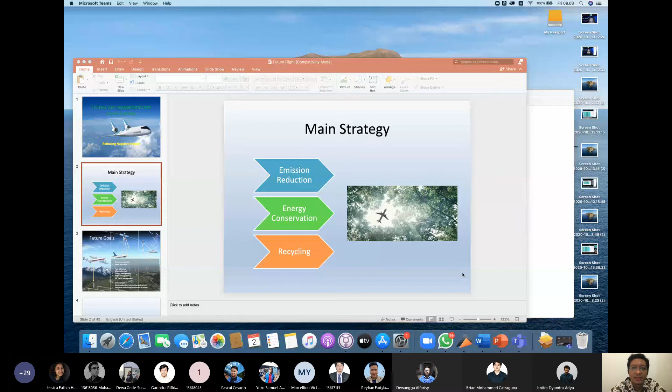We will talk about the future air transportation with green concept. So this is the main strategy. First, we want to reduce the emissions. Second, we want to conserve the energy, so we have to develop technology with less fuel consumption, or maybe also another kind of energy. Third, we want to recycle all of the waste and reduce the footprint in production.

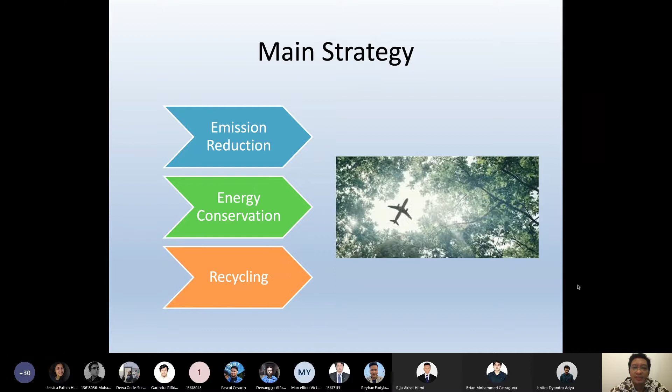We will discuss about this. This is the future goals, you can see on the left. This is the technology from the past decades, maybe 50 years ago. So all of the air transportation system developed mostly based on the technology after the Second World War.

And then in the current situation, we can use the satellite, for example, and also there is data communications already there to create a more robust and efficient communication system. But in the future we will use another technology. For example, you can see the new type of aircraft that maybe uses less energy using the most advanced aerodynamics design.

And also there is many kind of communication system using small satellites, microsatellites, such as Starlink that becomes controversial because they want to launch thousands, about 40,000 microsatellites. But if the technology is available and cheap enough and green enough, maybe we can use it for the next communication based on the satellite.

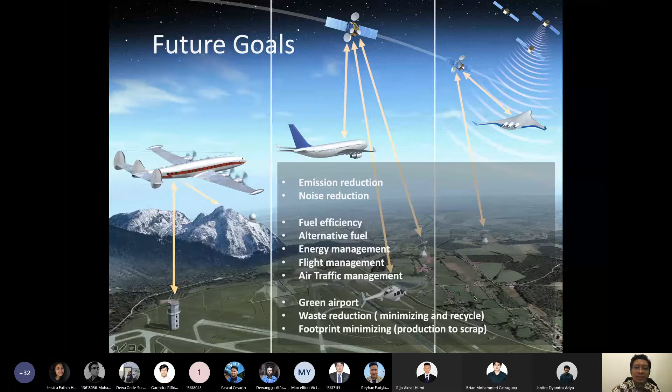Okay, we talk about the future aircraft design. You know that aviation has made steady and significant progress. This is about half a century, from the 1950s until today, and there is a 90% reduction in noise footprint, becoming more silent than previous jet airplanes, and also saving about 70% fuel improvement. So this will reduce the CO2 emissions. That's a good achievement in half a century.

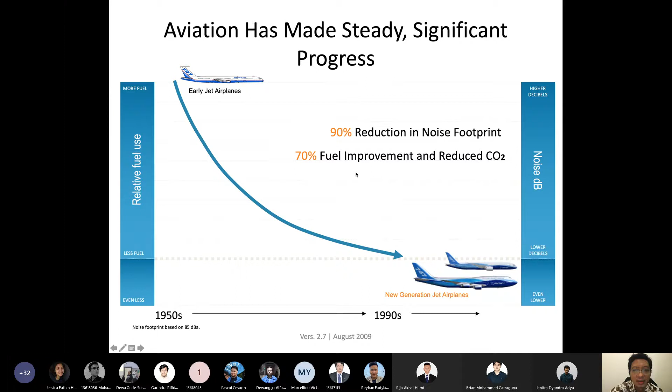But because air transportation becomes common and very popular, the total number of flights and flight times increase significantly, so we still have to consider how to achieve a more efficient system in aviation transportation. You know that aircraft technology is one of the most efficient modes of transportation, compared to current existing car transportation, for example.

But I think in the next decade we will transform to electric cars, resulting in a more efficient and less emission system. Using electric is not a good choice for air transportation though. You know about the battery - it's basically dead weight, you have to carry the battery for all the flight time. When we use liquid fuel, we may bring a lot in the early phase of the flight, but when we cruise, by the time the system becomes more efficient because we bring less fuel.

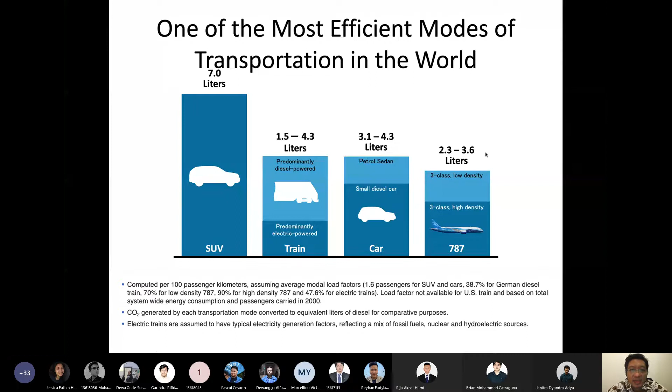Today's aircraft is the most efficient transportation. You know, to bring you from Jakarta, for example, to Amsterdam, to Europe, it's only about 13,000 kilometers, and a Boeing 747 usually takes about 70 tons of fuel. But compared to the distance and the time, the flight time is only several hours, not until one day - it's very efficient. So per kilometer, the specific fuel consumption is very low. Yeah, that's the aircraft.

Okay, this is the sum of the equivalent emissions, for example, still less fuel and less emission in today's technology. We hope that this technology will also transfer to other modes, so we can save or reduce pollutants coming from transportation. And I think electric cars will have the main role in reducing CO2 in the future.

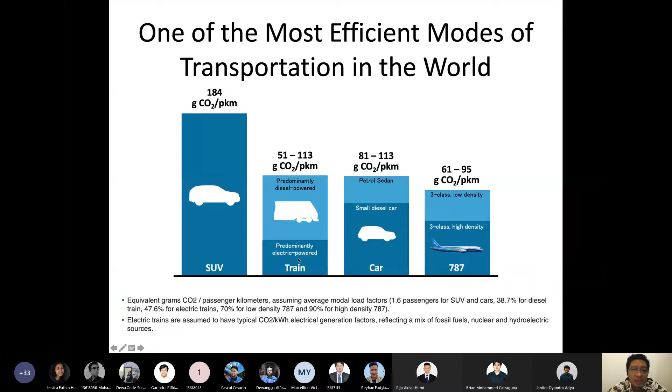Electric trains are assumed to have a typical electrical generation factor mix. Oh, this one is predominantly electric power. Yeah, okay.

And we already discussed this technology solution on aircraft emissions. First, we have to improve - and I think this is why we call it aerospace engineering, because the basic of aeronautics is aerodynamics. If we have better aerodynamics, then we need less structure, and then we can reduce the weight, and we need less power, so we need less fuel.

So all of the other technology will be affected by the aerodynamics improvement. Yeah, and I think one of the technological cutting edges, the state of the art of the technology in computational fluid dynamics, comes from aerospace engineering, because it's very typical.

One of our alumni, when he worked in Japan, he used aerodynamics. His job was to simulate the aerodynamics in the computer hard disk - the older technology computer hard disk using a magnetic disk, and the rotation is about 6,000 RPM.

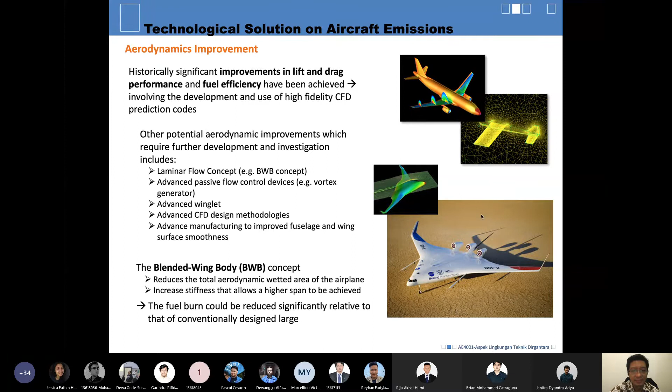Airframe weight reduction usually comes from new types of materials and also new structure design. For example, maybe you know about generative structure design—that's another state of the art technology in structure design.

We only put in the position of the load, and the computer will generate many alternative structures that give the most benefit but the least cost—so it maximizes the benefit-to-cost ratio.

You may know that if you take a structures course, there's generative design in structure. Airbus, for example, already used this new type of design to improve their structures and significantly reduce total weight.

If you know about generative design, the result usually looks most like a bio-design. For example, human structure—we have bones and muscles—and if you look deep into the bones, there are holes; the structure of bone is not rigid, not solid.

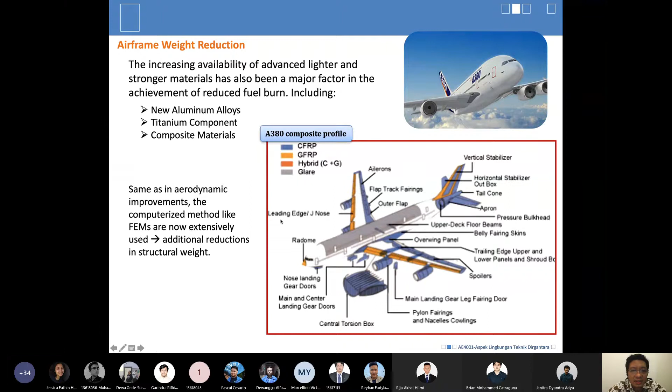The next is the propulsion technology. Thrust-specific fuel consumption has become lower and lower, which is very good. Also the high bypass ratio engine, and light materials, for example using titanium.

Also other materials, maybe ceramics, because we deal with high temperatures. But overall, the propulsion becomes more efficient.

In the future, because we use the electric engine, we can decompose one big engine into several smaller engines. That's one of the new designs in aircraft design, using multi engines, very small but distributed along the wings. You can see examples of future aircraft on YouTube.

So that's the advantage. We have several smaller engines, and we can use only part of all the engines available. For example, when we take off, we use all of the engines, but when we cruise or descend, we can turn off several engines and only use part of the engines available.

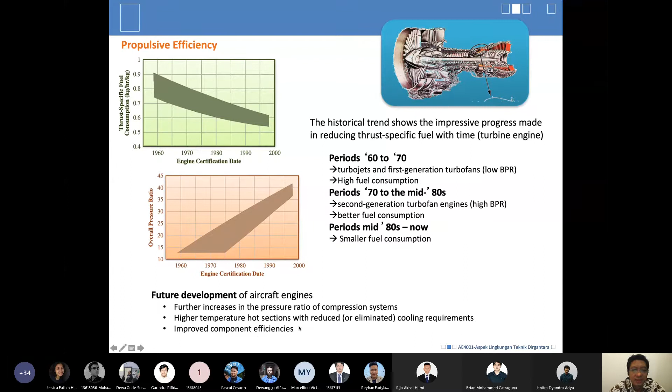So if we can contain the higher pressure and temperature, then we can make an efficient jet engine, and improve all of the component efficiencies. That's the future development of aircraft engine.

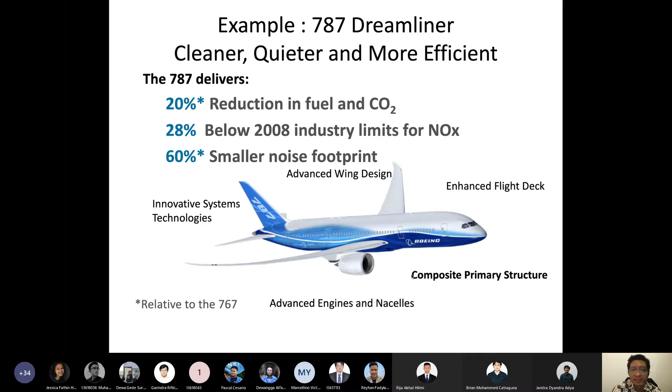Okay, let's take a look at future fuel. The previous discussion is basically based on design, the new improvement in aerodynamics, improvement in structure, improvement in engine. Most of the technology comes from the design side and production, but the fuel basically is something we get from nature.

The idea is to use fuel with high energy density, but more green and environment friendly. So we also discuss alcohols, methane, hydrogen.

I think there is a success story in hydrogen fuel flight, tested by a UK company from England. In the future, we will use hydrogen as the alternative, and it's already been tested.

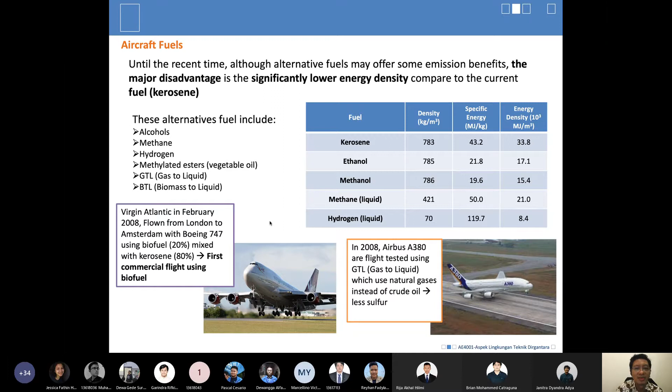Okay, so there's another issue. When we use petroleum-based fuel taken from the earth, it already contains or stores CO2. But if we use plant-based fuel, in theory, the CO2 emission will be absorbed by the plant itself. So there's a cycle.

That's the idea, but another issue is we shouldn't use fertile soil to produce the fuel, because then we would compete with the production of consumable plants like rice, wheat, and other consumable plants. So the technology focuses on how to use plants that can be grown in non-fertile environments.

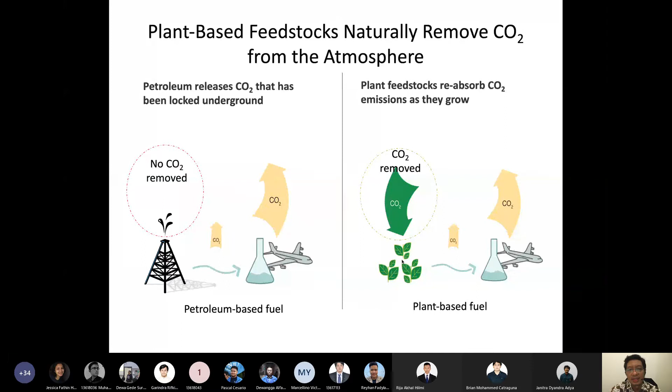Doesn't compete with food or promote deforestation, that's the idea. So the technology we want to use, for example, this is the non-fertile soil. How to use it - we can use a plant, what's it called, Chotora, or Jatropha. We call it jarak. Jatropha is a kind of plant that can be planted into the infertile environment.

Another technology, maybe we will use soybean, but soybean is a food plant, so it's not ideal because we compete with food. But we can use the oil from the soybean. So the technology focus is on algae and Jatropha.

And I think this is the future fuel that's very promising, because there is a lot of sea - we can plant it in the sea, and Indonesia's shoreline is very big. I think this is one of the technologies we can consider, especially if we want to replace coal, the energy from coal. We have coal - we are not rich in oil and gas, but we are one of the big exporters of coal.

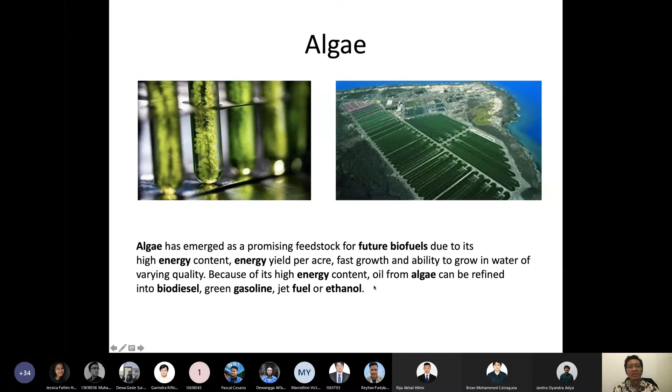But coal is very efficient in terms of energy management, but there's a lot of pollution emission. So another promising technology is from algae, because of the high energy content, and energy yield per acre is very high, fast grow, and ability to grow in water of varying quality. We can refine it into biodiesel, gasoline, jet fuel, or ethanol. So it's very promising technology to use algae for future fuel, and the oil yield is very high.

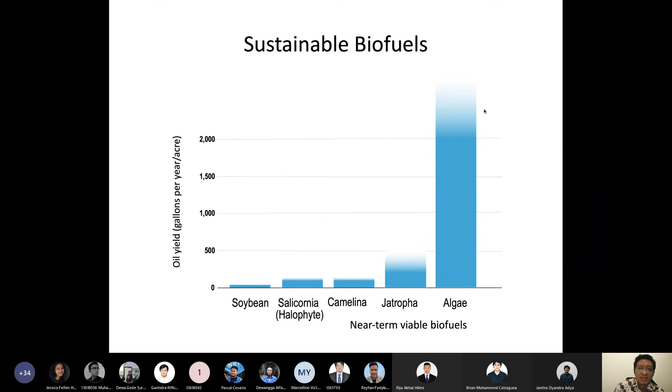Basically, Indonesia is a maritime country, we have a lot of water. So I think this is one of the promising technologies in the future, and we have to invest knowledge and technology in this field.

That's some of the biofuel test flights. Virgin Atlantic using oil from coconut, in 2008-2009. Continental using algae and jatropha. Air New Zealand using jatropha. Why jatropha? Because jatropha can be planted in the infertile environment. But I bet on algae, I think.

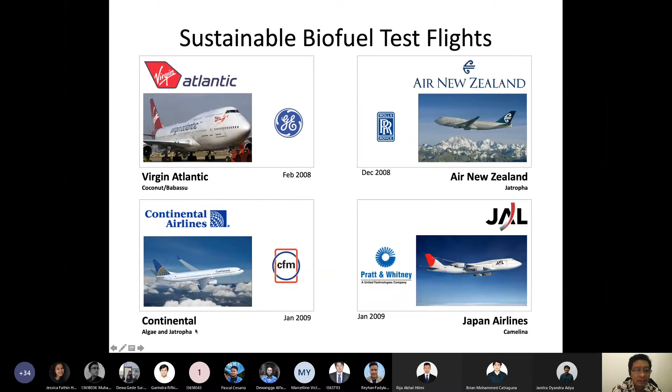Yeah, that's from the fuel materials. And another approach is to increase fuel conservation - we use less fuel because we can manage how to use the fuel. There is some research in the area where we can improve the efficiency of fuel use, because the fuel cost impact is usually 30% of the total operating expense.

Our transportation is very dependent on the price of fuel. When the price of oil is high, usually the tickets become higher, and when low, usually become lower. So there is a high dependency on the fuel price. Usually there is a saving, normally only 3%, using various leverage.

You can see in the upper part, this is jet fuel and crude oil price - there is a high dependency. And this is the jet fuel price, already cyclical, already up and down. Today maybe down because of COVID, for example, but that's another issue.

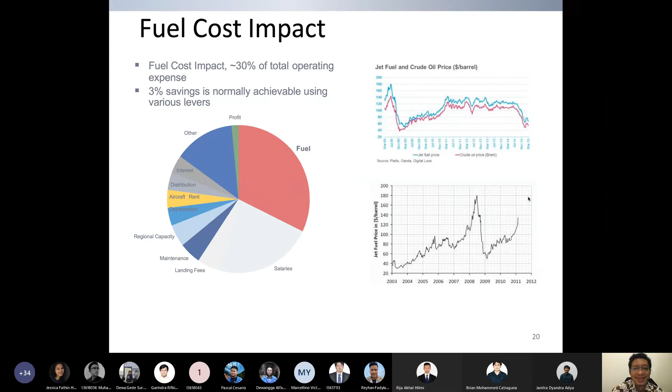Okay, this is the flight theory - thrust, drag, lift, weight. You know that thrust is basically to counter the drag, and lift against the weight. So if we can reduce the drag and also create more efficient lift, or reduce the weight, we can gain fuel saving. That's the idea.

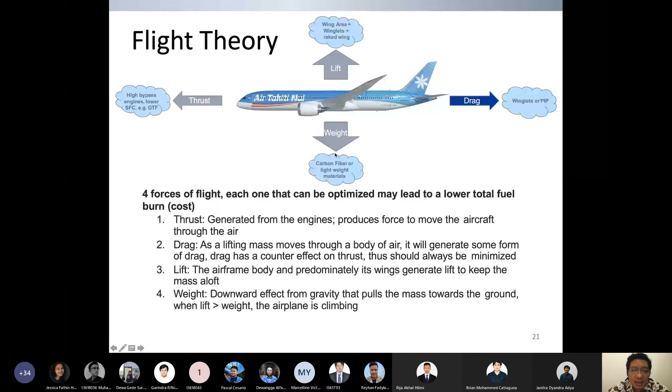Sometimes to reduce the drag we use winglets. Winglets or PIP - high bypass engine. This is carbon fiber, this is the efficiency of the aerodynamics. That's the theory, and there is the phase of the flight.

And if we consider using smaller but multi engines, then we can use all of the power in the takeoff and climb, and only turn on several engines in the rest of the flight. So maybe we can increase the efficiency, because fuel efficiency is influenced by the phase of the flight. You know that takeoff has the highest consumption rate, and then climb, and then cruise, and then we approach because we have to control the aircraft.

Usually we try to balance between the thrust power and also the gliding. In the approach, we take increased fuel consumption, compared to when we descend or in taxiing. So this is the detail of the fuel consumption. For example, at takeoff, fuel use is almost 18,000 kilograms per hour, but the time is very short, only about 1.5 minutes. Still, the cruise takes the most part of the fuel consumption, but when we want to save fuel, we can consider the phase of flight.

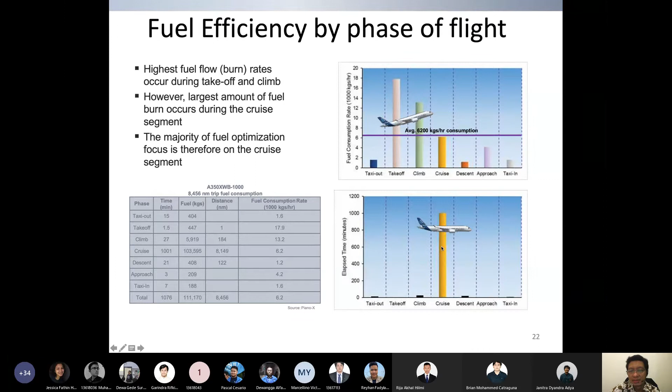This is the time breakdown. That's why we design the aircraft, mostly the parameters based on the cruise condition, yeah, the altitude, the speed. Usually in the cruise phase, maybe 95% of the time we use in cruise.

This is only for ground operations when we want to save fuel. We only turn on several components when we are already ready to fly. For example, prior to departure and after arrival, the APU is run because we want to start the engine, but when we are already ready to take the flight, then we turn on the engine. Sometimes, because the APU also needs fuel, we use ground power to support the aircraft, usually for two kinds of purposes: the first is for electricity, and the second for pneumatics or pressure.

For the ECS, the environmental control system, we need the pressure, and for the electronics, we need the electricity. So there is ground power support. APU usage during ground operation is generally managed by flight crew, ground crew, and the technical maintenance crew, so we can save the use of the APU and save some fuel.

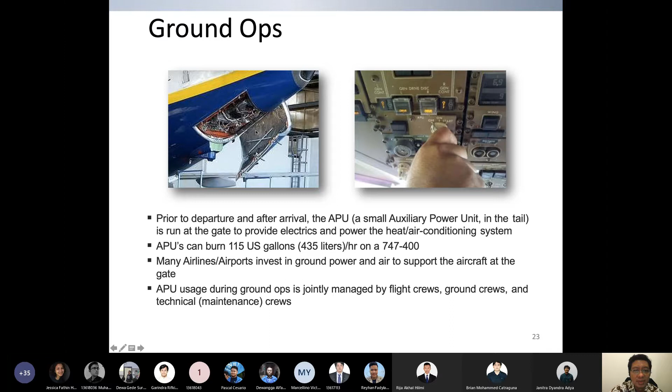Taxi out and departure, that's some of the problem when there is congestion. It's better to wait on the ground, not in the air. So usually we avoid holding and postpone the flight, because maybe at the destination there are issues with congestion or weather. The air traffic management usually recommends waiting on the ground, so sometimes there is queuing in the taxiway.

Wait times: delaying APU start until 5 to 10 minutes before pushback can also save fuel. Pushback is usually from the position in the parking area, and then there is a ground car that can push, because usually aircraft only move forward. You can use the engine to retreat, but it takes more fuel, so basically it's better to use a pushback car.

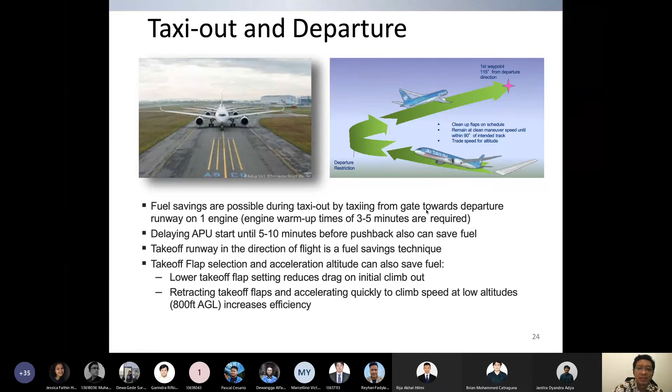There is ongoing research in this field that can also benefit fuel saving. Fuel saving is the main topic, and you can take it as your final assignment script. You can take topics on fuel saving using a management approach, just like this.

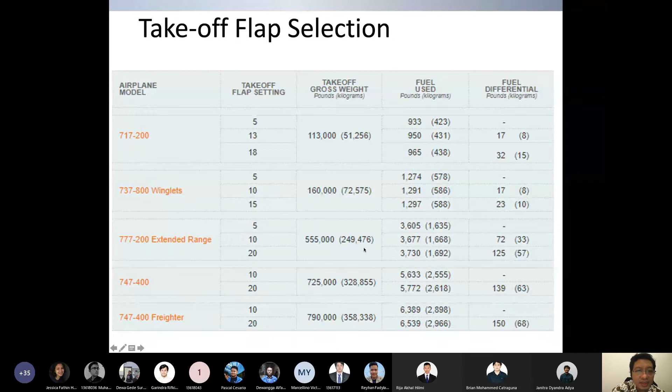Cruise altitude and speed selections also give advantages or disadvantages. Sometimes we can choose the cruise flight levels, but sometimes we have to go up and down due to regulations. Cruise altitude and speed selection can be optimized to decrease fuel consumption. Usually, all aircraft design considers the best parameters based on cruise altitude.

Generally, higher cruise altitudes give more efficient flight and generally have smoother rides, clear of weather. The optimum altitude generally yields the best fuel mileage. The density of the air becomes lower at high altitude, so there's low drag but also low lift. But after we reach a certain altitude, we just maintain the flight level, so the lift is only basically sufficient to stay at that flight level.

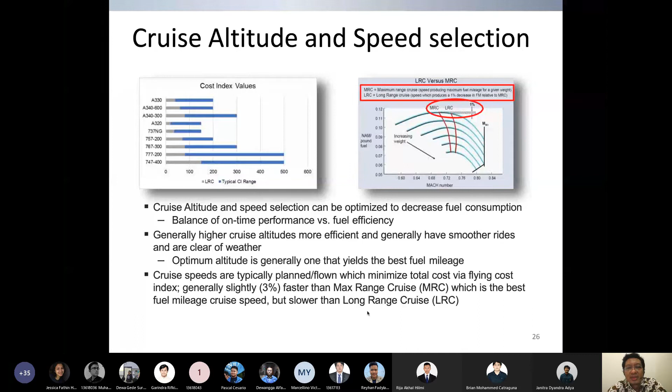That's the cruise altitude and speed selection, and you know why? Because at cruise altitude we can get less drag. Higher altitude, less drag. And speed selection is basically because there is some limitation when we consider Mach 1, so you have to slightly lower it. This is the high subsonic aircraft, usually 0.8 to 0.9 Mach.

Because we want faster flight, but there is some limitation. If you go faster, there is an increase in drag. So this is the sweet spot, at 0.75.

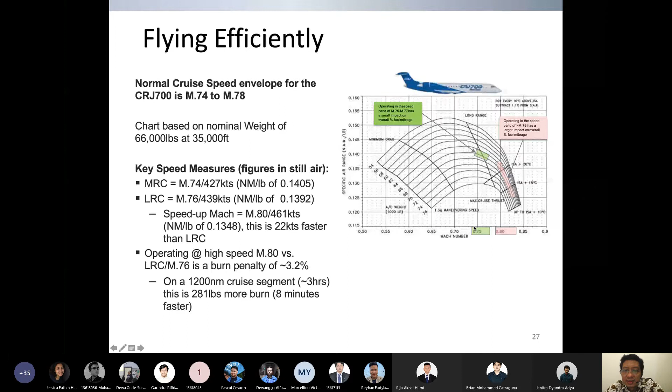And another approach is to create an efficient path during descent and approach. Because you cannot directly go to the landing strip every time you want to land. You have to wait for clearance, and sometimes there are airways, rules, and checkpoints, because the supporting radar usually operates at very high speed. Maybe in the early days only 60 RPM, but I think today it's more rapid than that.

So you have to check in at several checkpoints and cannot use the direct flight path to the landing strip. But today there is some research to create the most efficient path in the airways.

Since cruise fuel is optimal fuel burn, flights are generally flown at cruise altitude as long as possible until an idle thrust descent can be initiated. A descent initiated too early results in early level off, which requires more thrust at lower altitudes, because you have to maintain the altitude level. So too early is not good, but too late is not good either.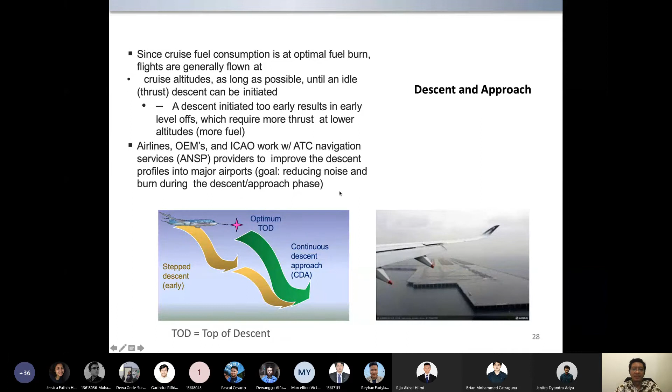And landing, rollout, and taxi in. Fuel saving can be achieved by reducing drag and therefore requiring less thrust during the approach phase, by using less than full flaps. This is flaring, but it takes experience from the pilot.

So fuel saving can be achieved by reducing drag. This is similar to takeoff. This is the optimum setting for the flaps.

Flights can utilize idle reverse thrust after touchdown to minimize fuel flow during rollout. This is about how to brake the aircraft, but not too slow, because after that we have to taxi.

Once engine cooldown times have been observed, generally 3 to 5 minutes. The aircraft can taxi in to the gate using one engine.

APUs are generally not turned on after arrival if sufficient ground electric power exists, instead of taking electricity from the engine. There are usually two electricity generators, one per engine, so we can use just one from a single engine.

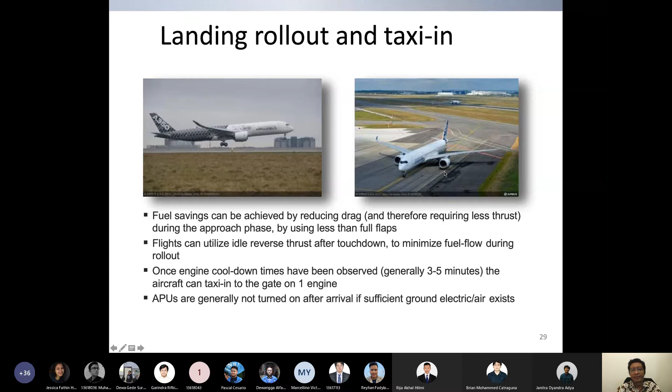Other fuel saving opportunities include engine core washing 2 times per year. This is maintenance - less friction means the engine runs more smoothly and increases fuel saving. I think it's just like an engine tune-up.

Reducing fuel reserves toward regulatory minimum - this is the mandatory fuel for an alternate airport, basically usually only about 5 to 7%. This is enough for an alternate route, so when the destination airport closes, you have fuel reserves to go to another airport as an alternative.

Replacing older technology fleets with new tech, usually engines and also wings. Engines work against the drag - thrust against the drag - and wings provide lift against the weight. So using new technology, we can get more efficient technology.

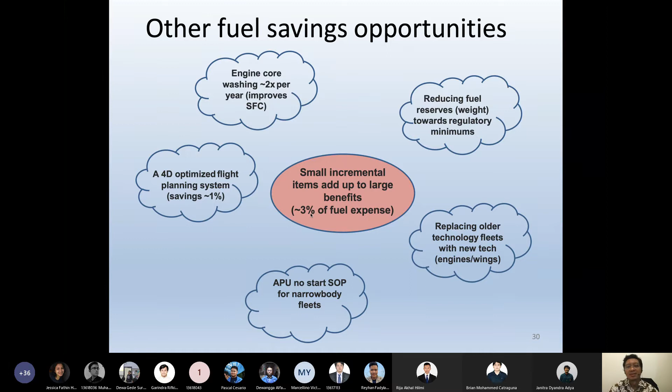So small incremental items add up to a large benefit, about 3% of fuel expense. Why such a low number? Because 30% of the operating cost comes from fuel. And if you imagine the many flights per year, then 3% is quite big, multiplied by the number of flights, times the total fuel used in air transportation.

That's about how to save fuel by flight management. Another approach is air traffic management - this is about how to manage the airways.

Air traffic management improvements can benefit the environment by reducing inefficiencies in the current system. Usually current flight paths, departures and arrivals are not optimized for full efficiency. Using today's information technology, we can use computers to calculate the best possible scenario to dispatch flights, and when to dispatch them, because in real conditions sometimes we have to wait due to issues at the destination airport, for example because of weather.

Maybe it's not wise to depart the aircraft immediately. Usually we wait for the clearance in the destination airport, and based on that, with predictions, we can depart. That will minimize the time when the aircraft wants to land, so we avoid holding or loitering the aircraft at the destination airport. So that's how air traffic improvements can benefit the schedule or flight plan.

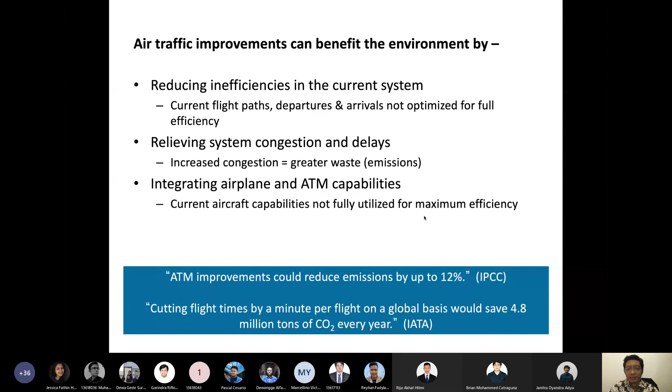This one is about management in the descent and approach, like we discussed previously. ATM offers near-term gains in environmental performance because we have an optimized flight path. Industry is developing technology solutions that cut fuel burn and carbon dioxide emissions, and an example is tailored arrival. I think Boeing and IBM have done research using IBM technology to arrange the flight path and queuing in the air.

For example, at a very busy airport like Heathrow in London, JFK in the US, or Soekarno-Hatta in Indonesia, there's usually a very busy hour. If we can rearrange who lands first and who lands later, creating a queuing system, the whole system gives benefits and cuts fuel burn. So that's the idea of tailored arrival.

Tailored arrival is a continuous descent approach flown on data link, with continuous information. There's a 4D path: 3 dimensional plus the fourth, time, set for local constraints and timing to match traffic. In this example, three aircraft come together, and because of coordination through the data link, the computer can suggest who lands first and who lands later, including the path and runway they can choose.

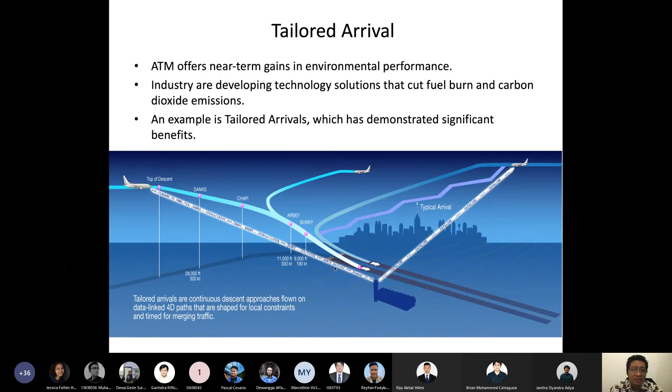This is like the parallel runway setup, such as in Soekarno-Hatta. We can use one runway or two runways, all for landings, or sometimes one runway for landings and one for takeoff, depending on conditions. That's why an information system with updated data is very crucial. Very crucial. That's the idea of tailored arrivals.

Next is efficient routing and improved airspace operations. There's some video I'll give you later. Airbus created research about something like a tunnel in the sky. For example, from the US going to Europe, over the Atlantic Ocean, they imagine parallel airways.

So each of the aircraft will take the one tunnel, very parallel, laterally and vertically. You can imagine there are several tunnels, and they fly together. After that, when they arrive in Europe, they can spread into different pathways.

So this is about efficient routing and improving airspace, because there is a rule. For example, when you go east, usually we take 30,000 feet, but when going west, usually maybe 28,000 feet, so 2,000 feet different. So there are airways.

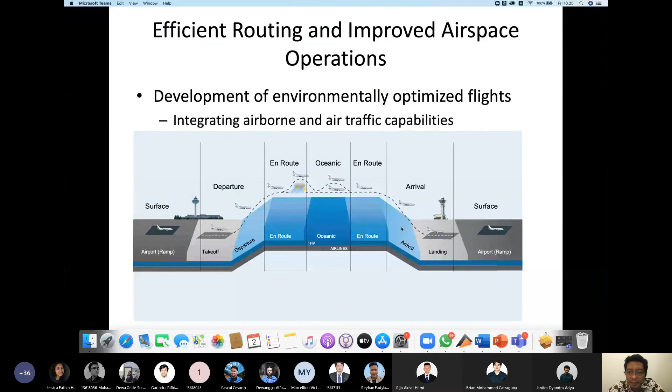Okay, this is another technology. I think the key aircraft feature for the RNP is the path. This is some of the technology to manage it. This one is about tailored arrival, high throughput surface operation, data link, and ATM tools, air traffic management tools. ADS-B, this is aircraft broadcast from satellite, and also other terms.

I want you to collect some of the terminology: surface and departure, en route domestic climb and cruise, oceanic and remote, en route transitional to arrival, and surface.

Another issue, you can see this is the operation in the ATM center. This is the goal for low noise and minimum fuel departures. We use 4D RNP. This is the technology, tailored arrival, and data link for real-time communications, and also ATM tools, a computer system to give suggestions.

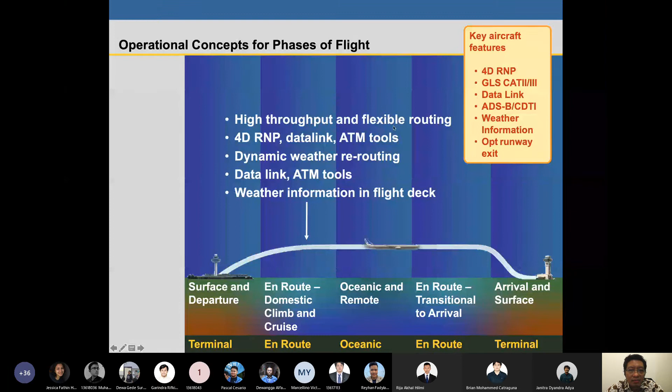And in the en route phase, this is the concept of flexible routing. Sometimes you have to change the route, but you can take the most efficient route. Also this is 4D - basically three-dimensional, and the fourth is time - data link and ATM tools. Dynamic rerouting, that's very important.

That's very important because usually we spend a long time en route, so the weather is very important. Sometimes we have to avoid things like cumulonimbus, because when dealing with that type of cloud, it means there is turbulence. Turbulence - so the cloud becomes like a bubble.

But if the cloud is usually thin, like cirrus, usually there is clear air and maybe only different speed in the air layer. But if we deal with cumulonimbus, a bubble-like cloud, that means there is turbulence. So dynamic weather routing and rerouting is very important.

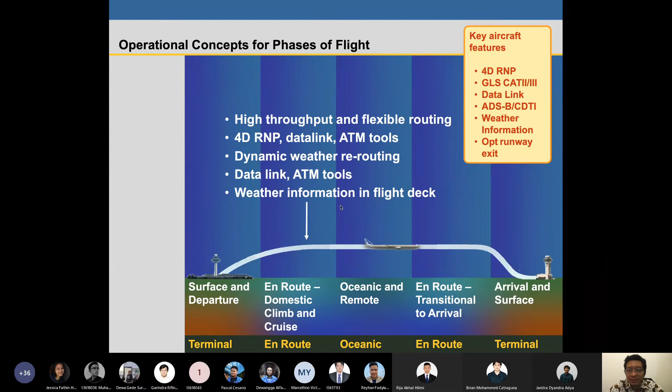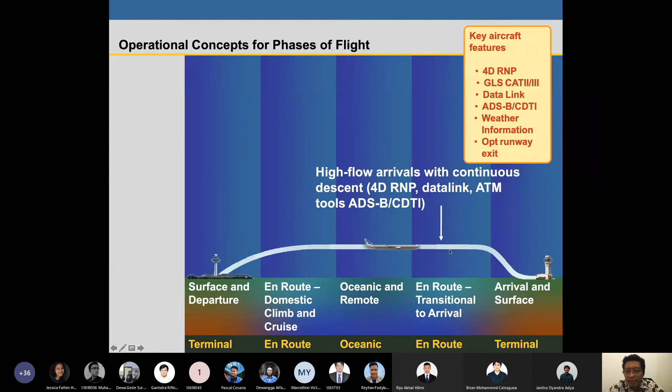Okay, high flow arrivals with continuous descent. This is a technology for the 4D RNP, data link ATM, and also ADSB. It's about the satellite communication system. High performance approach and landing using same technology.

I think GLS is a GPS landing system, based on the GPS, sometimes based on the instrument landing system. Usually there is instrument on the ground, but GLS is usually using satellite. Information also comes from ADSB.

That's the general idea, that we can optimize for each of the phases of flight. There is 1, 2, 3, 4, 5. Oceanic and remote is usually for long haul.

For example, there are some rules to fly across the ocean, especially Pacific and Atlantic, because of safety reasons. I think only big aircraft can cross the ocean, such as Pacific and Atlantic. Usually if it's mid-size, there's a rule called, I think, ETOPS.

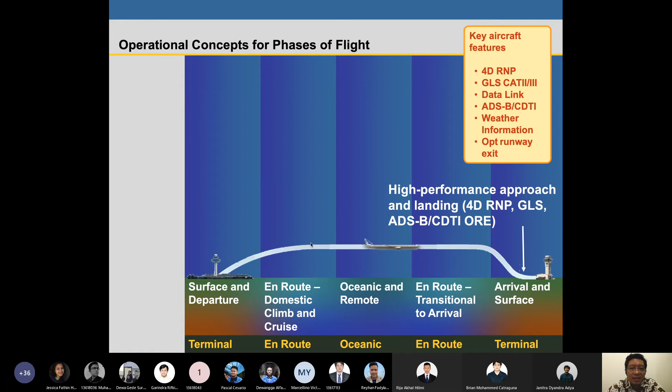Extended, ETOPS extended, what's that? There's a rule that if you fly, you have to be able to reach the near shoreline in adequate time. So it's about 200 kilometers, I think, from shoreline. So when there is something in trouble, you can make an emergency landing at the shoreline.

Okay, this is the map. Currently we are in 2020, this is a map from 2005 until 2030. This is some of the technology that is developed, contents of ATM automation, communication, navigation, and surveillance. For example, surveillance in the old past, we used primary and secondary radar.

I think it's still relevant today because sometimes the data from satellite we can't receive because of the weather. So I think most of the airports still use primary and secondary radar.

Primary radar, usually we create the source of the radar. Secondary radar is to receive the back, the back of the radar signal. So there is a primary and secondary radar.

And ADSC, this is the system based on satellite. And another one, ADSB. In ADSB, I think the aircraft broadcasts the position. The aircraft receives the information from satellite and also broadcasts the position, and then the satellite takes the position of the aircraft and gives the information to the ATC.

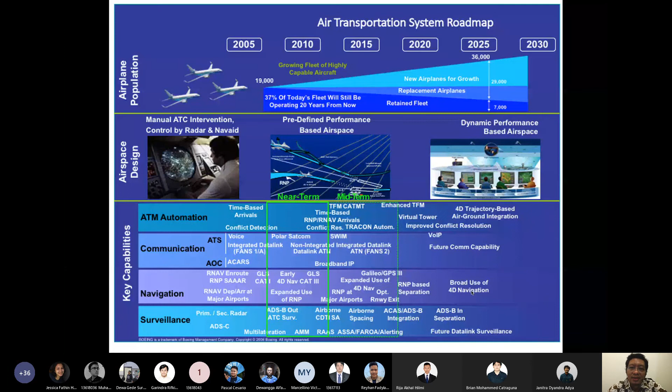Okay, and the next discussion is about footprint reductions. I'll ask for 15 more minutes. Footprint reductions, okay.

Basically, the idea is to create seamless interoperation, so less friction and less waste from the supplier. Let's create the component - for example, just-in-time production means we can reduce the waste and energy for storage.

But it's not easy in the high-tech industry, just like this. But maybe for some of the components, I think we can use the concept of just-in-time - when we need it, we order it, and just in time the component comes.

I think the idea, we can take the example from Toyota. The Toyota system is very famous for just-in-time operations. I already visited one of the Toyota factories in Nagoya, I think.

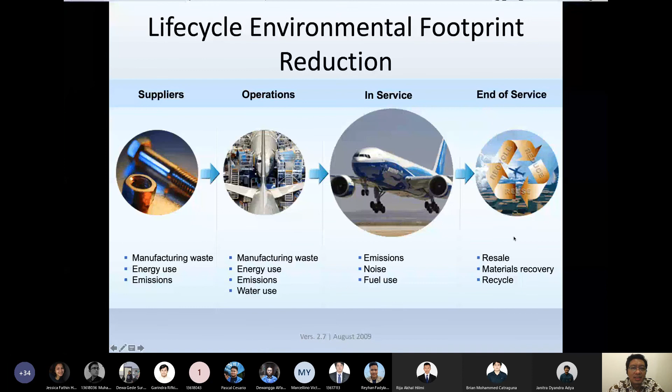Okay, that's the idea - aligning the supply chain, so we can have seamless operation, less time, less energy. The basic idea is collaboration - several companies work together to create the integrated system.

Usually this uses enhanced communication with suppliers. For example, I need something, I just input it to my terminal computer, and then my supplier knows about our needs in real time, and fulfills our needs by sending the components.

Imagine just like Amazon.com - handling millions of transactions a day, with supplier, storage, delivery, and also complaint handling, all as an integrated system. Because of that, Amazon can reduce costs, and that's why Amazon and Alibaba become popular, because the production is very efficient.

Identify areas of common interest, select project and partners, evaluate and share results. These are some to-dos in collaborations.

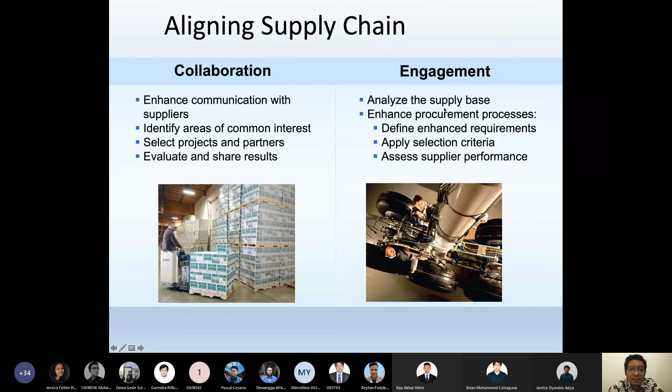Lean system - Lean was popularized by Toyota, I think. Lean is a natural ally of the environment. This slide is taken from Boeing, and Boeing also implemented the Lean system. I think the Lean system was adopted from Toyota by all the big companies. For example, the Boeing 737 airplane program can reduce...

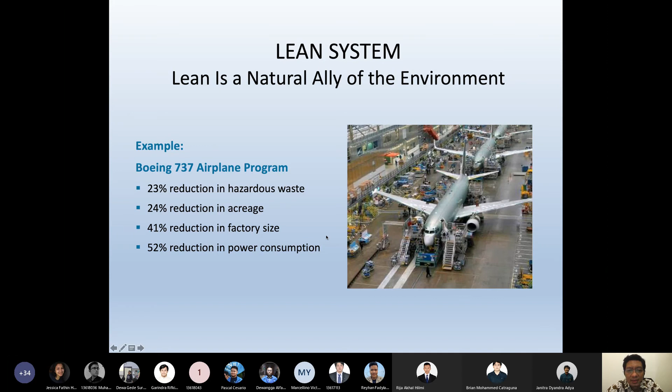...hazardous waste by up to 23%, reduce the area for assembly, reduce factory size, and - this is very interesting - achieve more than 50% reduction in power consumption. I think this reflects a more efficient assembly system.

This is end of service, when the aircraft is not used anymore. End of service is not end of use - that's the jargon from one of the alliances, I think. Safe and environmentally responsible management of aging aircraft fleets is our goal.

In the US there is some sort of place where we can put all the aging aircraft before we scrap them - I think in Nevada or somewhere. In the old days, usually we take all the electronic parts, for example we can take the copper and some coils. Also, in the old days the materials from the airframe were usually aluminum, and aluminum is 100% recyclable. So this is how we scrap aging aircraft.

Safe and economical return of aircraft engines and parts to revenue service - maybe through repair or maintenance, or the idea of how to create money from the aging aircraft and spare parts. Safe return or reclaim of material back into commercial manufacturing - this is recycling raw materials back to produce a new aircraft.

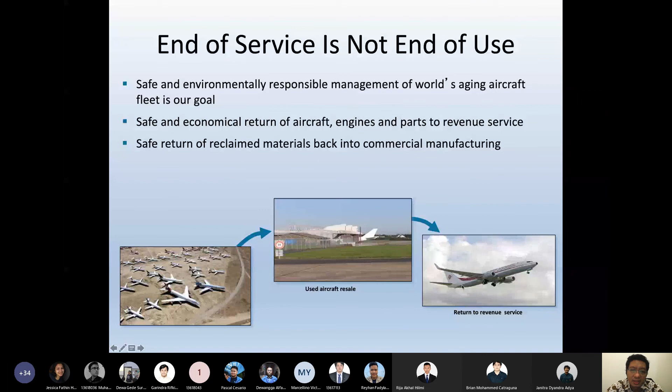How about aging aircraft? I think some parts, when overhauled and maintained, become relatively new again, so don't worry about that. But some parts must be replaced by new ones. Basically the age of airframes - aircraft can be used until 30 years.

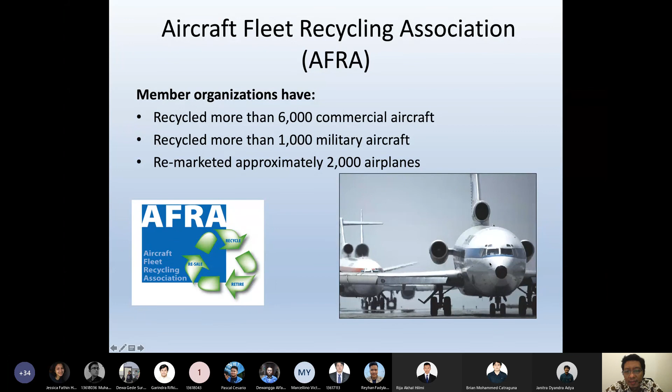For aircraft, usually all the metal parts can be recycled. I think chemicals are usually not quite easy to recycle. Usually we can recycle metals, paper, plastic, woods, and asphalt, for example, but when we deal with chemicals, it's not easy to recycle.

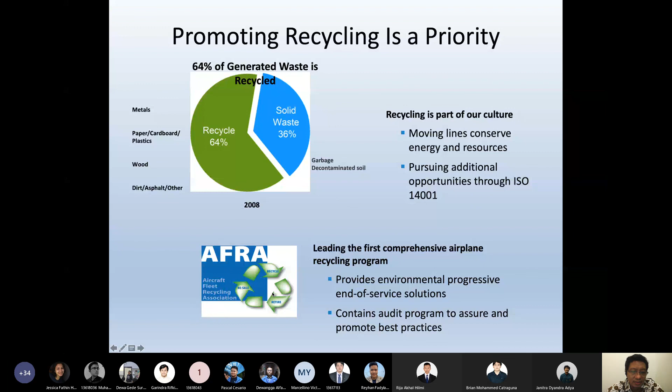Okay, thank you for your attention. Any questions? Is this clear? Okay.

And how do I go back to the Microsoft Teams screen? Oh, this one. This one. Okay.